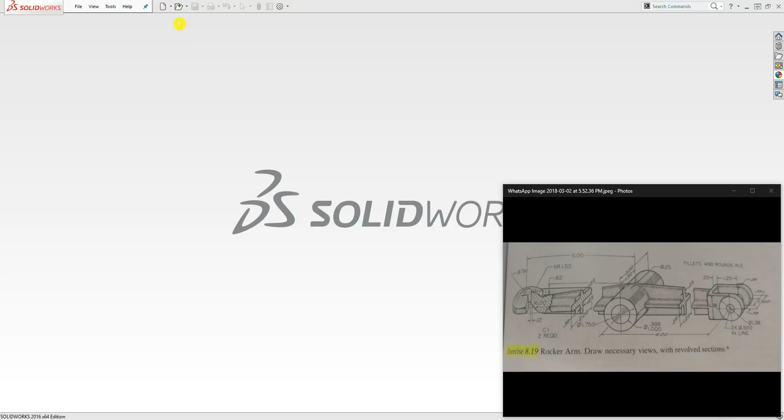So just start a new part file, and make sure you are in inch. Go to your options, document properties, unit, make sure you're in inch, and click OK.

The first thing we are going to do is start with this piece, and we're just going to model everything around this piece. The way I always find the plane to draw on is if I click sketch before I select the plane, all the planes come up, and looking at this view, I know I'm going to draw that on the front plane.

So I select the front plane, and you just want to draw your cylinder. Make sure it is on the origin point. I'm just going to move it here so you can see. We know the diameter of it is 1.75, so I'm going to set it to 1.75.

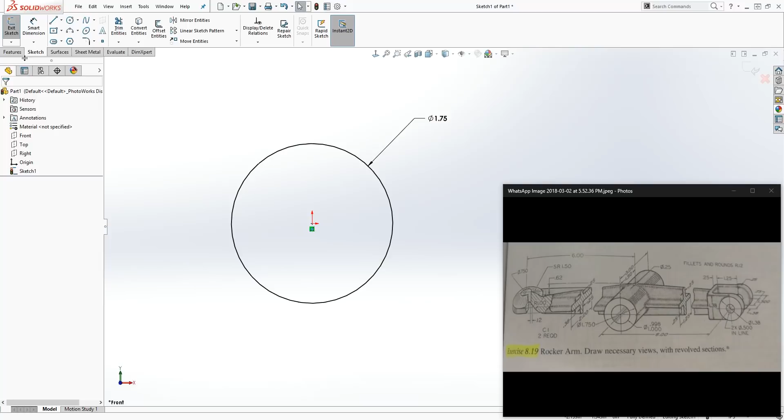Now you're going to go to feature, extrude. This is symmetrical because if you look, it is 3 and it's 1.5, so that means it's symmetric. I'm just going to extrude it by the mid plane, and the distance is 3. Once you have that, click OK.

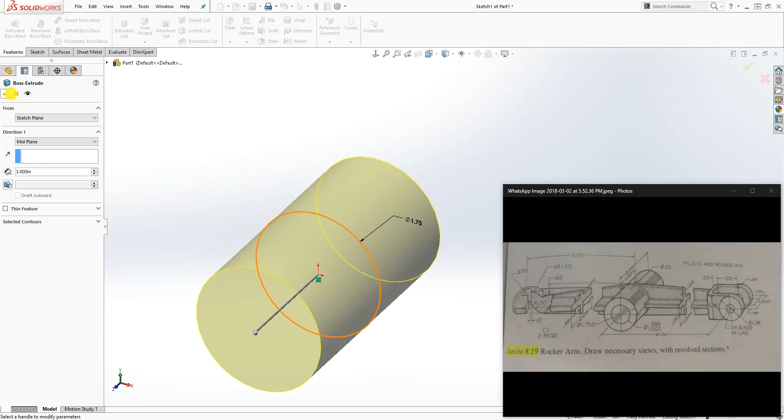Good, so now we have that. The next thing we're going to draw is this piece over here. So what you're going to do is, again, that's going to be on the front plane. Select the front plane, sketch, number 2.

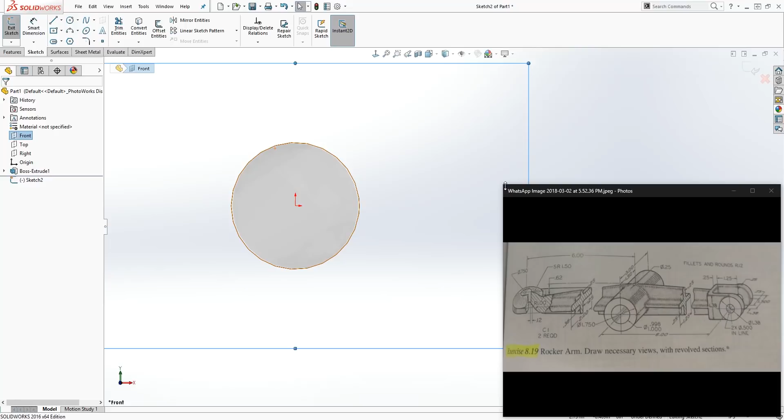I'm just going to zoom it over here because this is kind of in the way, maybe minimize this a little bit. Now draw a circle. Make sure the center point of this circle and the origin point is horizontal to each other. We know that the diameter for that circle is 1.38, so we can just add 1.38.

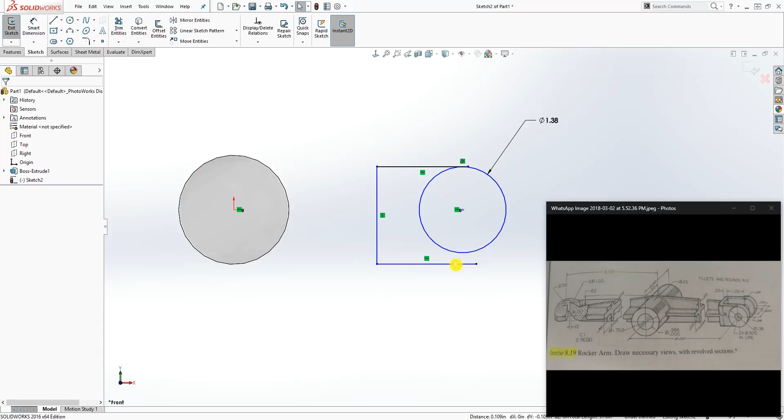Now we're just going to draw a line somewhere up here, a line down here, something like that. Make this line and this circle tangent, and the line and that circle tangent. Once you have all that, we're going to use the trim tool, and I'm just going to trim away all the excess line. Good.

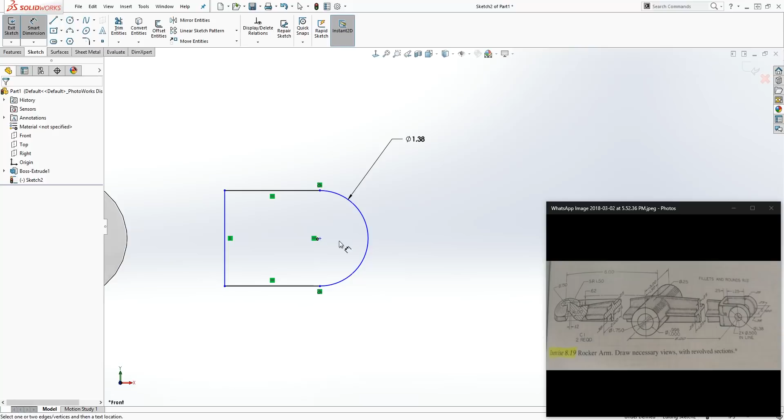So we have that. We know the distance from the center point to the back is 1.5 because it's 1.25 plus 0.25, so this distance is going to be 1.5. We also know that the distance from here to the center point is 6, so from this center point of this circle to this center point of that is 6. So that is fully defined.

Again, we're going to go feature, extrude, again by the mid plane, so you drop down mid plane. Right here, this is symmetry - see, the 0.75 is symmetrical, and the distance of this rib over here is also 0.25. So that is 0.75 plus 0.5, because it is 0.25, 0.25, and 0.75, so that's the distance we want. That would give us 1.25. Once you have that, that will be the distance, and click OK.

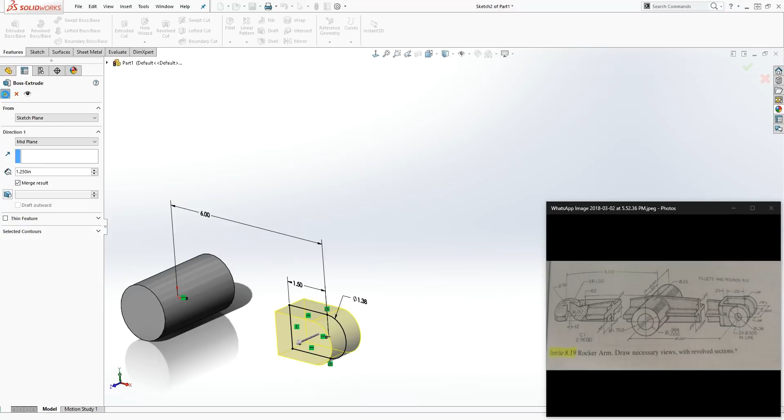Good, so now we have that. The next thing we want to draw is this little round piece. If you look, it tells you from here to that face is 0.38 because we are not doing that now - we only just need to add the extra piece on this side because this side is much thicker than the other side. We already have the 0.75 plus 0.5, which gives us the distance to about right here, so we just need that extra piece.

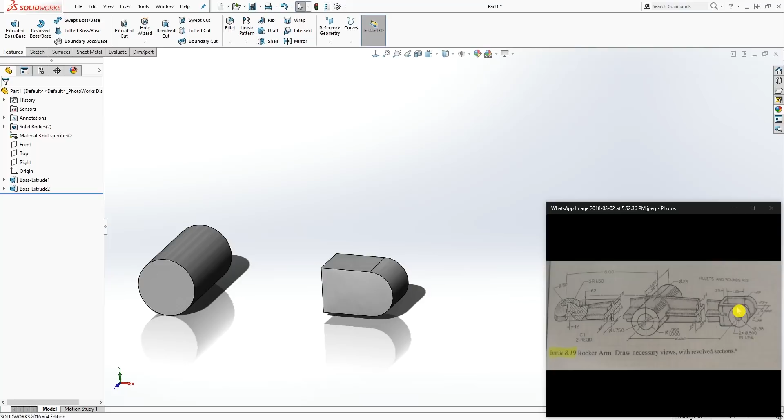So on this face, sketch, number 2, and you can draw a circle over here and make this circle and that edge co-radial. Once you have that, now you're just going to go feature, extrude. The only extra piece we need to add here is 0.13. I would measure everything once we're done so it makes sense. So it's going to be 0.13, and click OK.

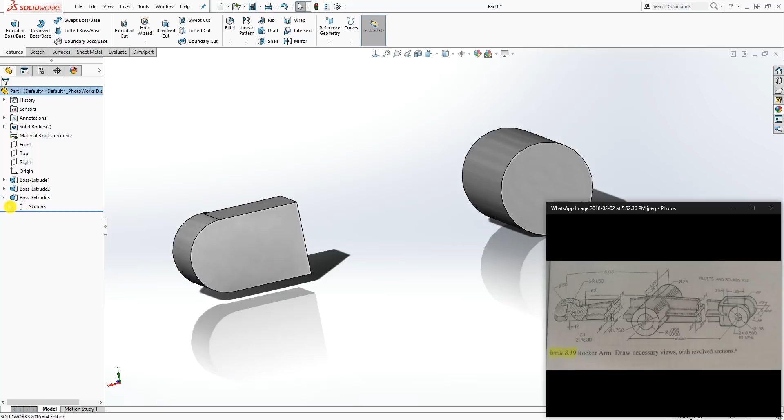And we're going to go on this side and do the same thing, but you can bring this down, show that sketch, and click this face and sketch.

And now select that sketch for this convert entity. So once you convert it to that side, then you can feature extrude, and this one is going to be 0.12,

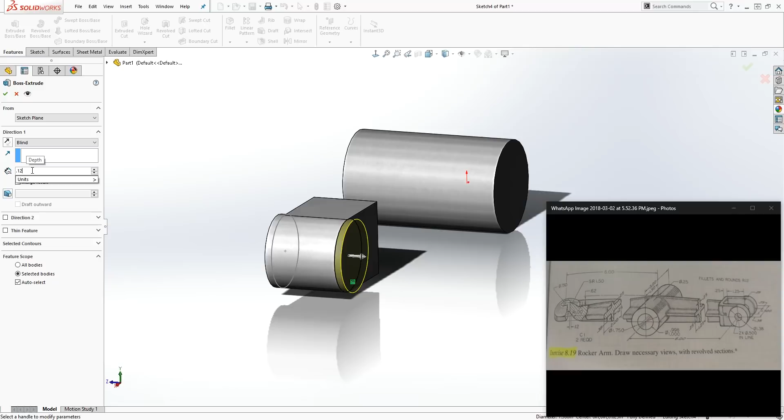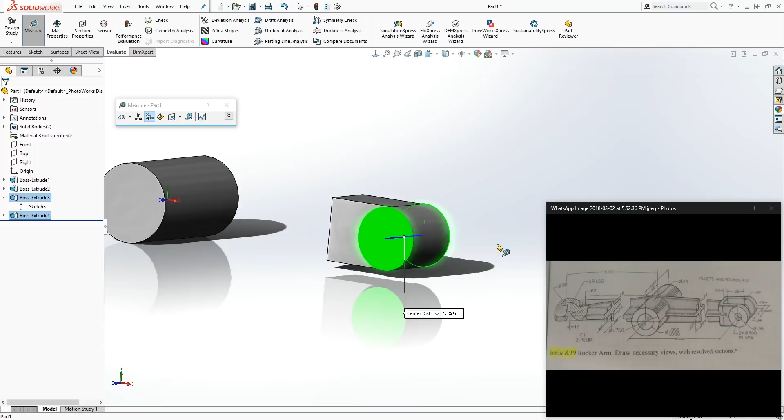and click OK. So now if I measure the distance from, and I can just hide this sketch because I don't need it. So if I go to evaluate, measure from this face to this face, it is 1.5, which is exactly what it should be. Good. So I'm just going to close that and moving on.

So now we are going to draw this rib over here. So what we're going to do is find that plane on the right plane, sketch, number 2. And I'm just going to draw a center rectangle or something like that. And the distance is going to be, say right here it is 0.5. So this dimension is 0.25.

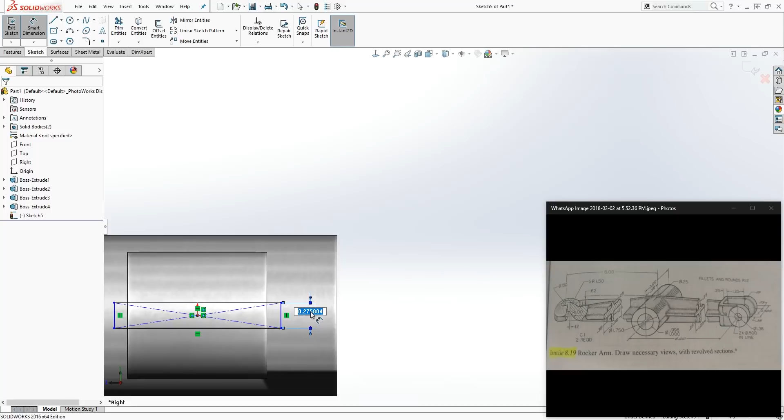0.25. So my keyboard is acting up a little bit. 0.25. And let me try that one more time. 0.25. Enter. Okay. And the distance is going to be 1.25. So right here, the length is going to be 1.25. And once you have that, so that looks something like that.

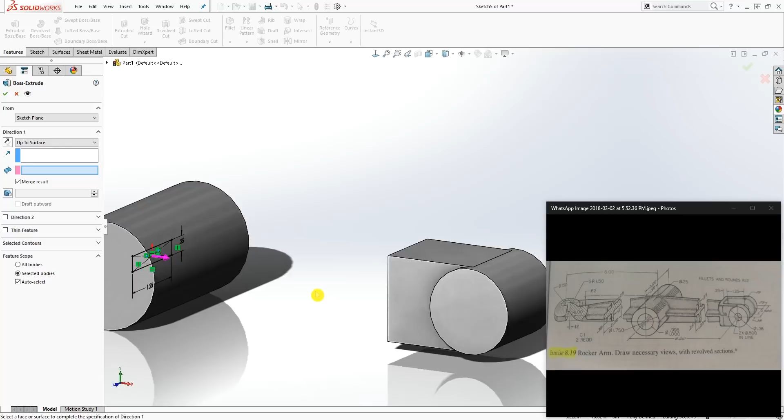So go to your feature, extrude. You want to select up to surface, and you want to select this face. So you want to extrude it something like that, and click OK.

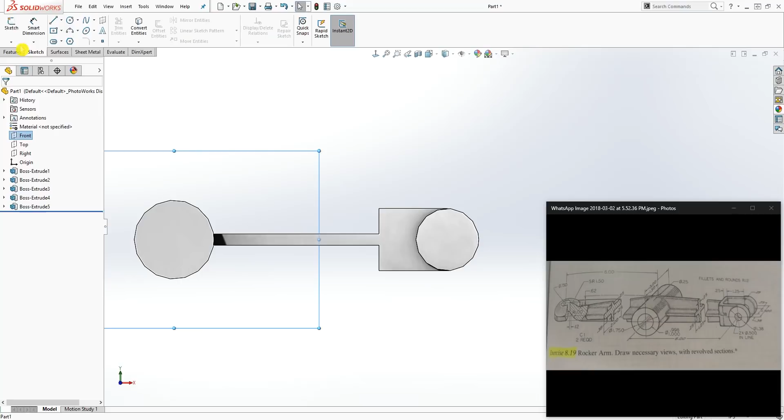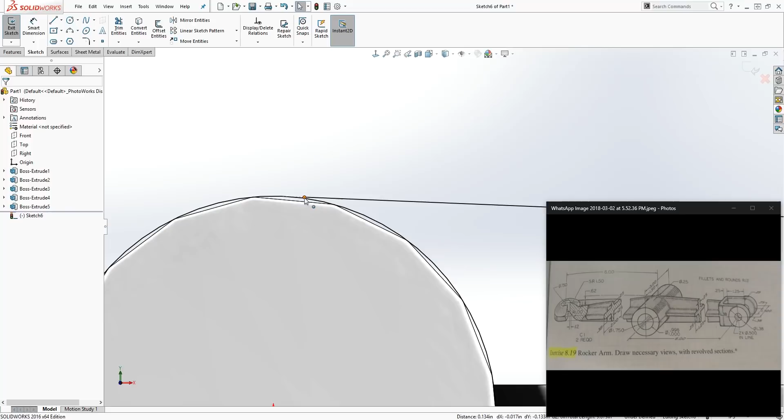Good. So the next piece we're going to draw is this top piece over here. So that one is going to be select on the front plane, sketch. So the first thing we're going to do is select this edge and convert entity, and now you just want to draw a line, something like that. Just draw a line that is coincident with that, and make that line and that convert sketch tangent to each other. And I'm just going to drag this out so make sure everything is touching.

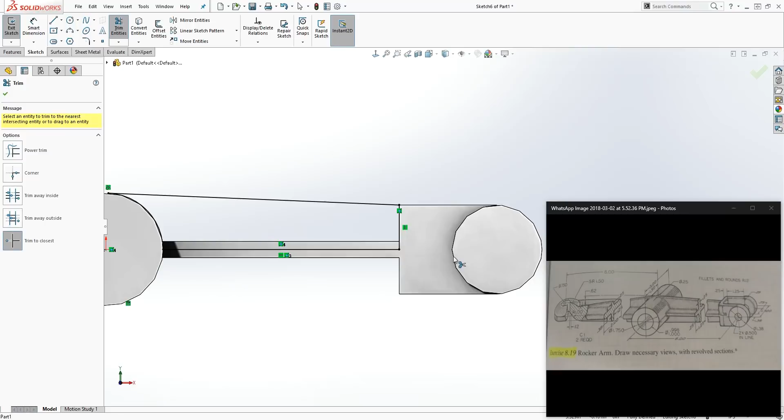Then I am going to draw another line over here down, and something coming this way. So you have this profile, so I'm just going to trim those excess lines off. So you should get a profile like this. So once you have your profile, what you want to do is feature extrude by the mid plane, and it is right here. That one is also 0.25, so you type in 0.25, and click OK.

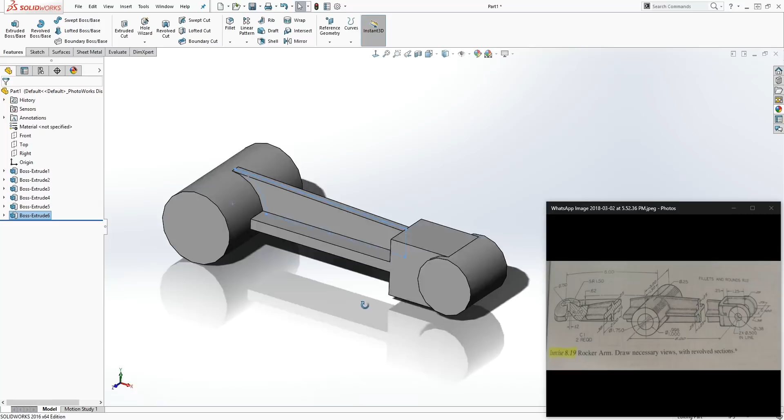Good. So once we have that, what we want to do now is just mirror it down. So we go to the mirror. We want to mirror it about the top plane, and the feature we are mirroring is this, and click OK. Good. So now we are done with this front part for now. So we want to make the same thing on this back end.

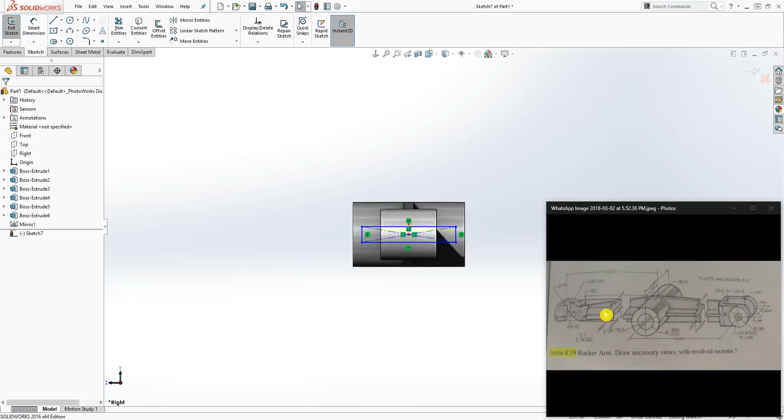So we are going to select the right plane again and sketch and number 2, and I'm just going to draw another center rectangle in there, something like that. And this one, the dimension is 0.38, so this is going to be 0.38, and the length is 2, right here, 2. So we're going to make that 2.

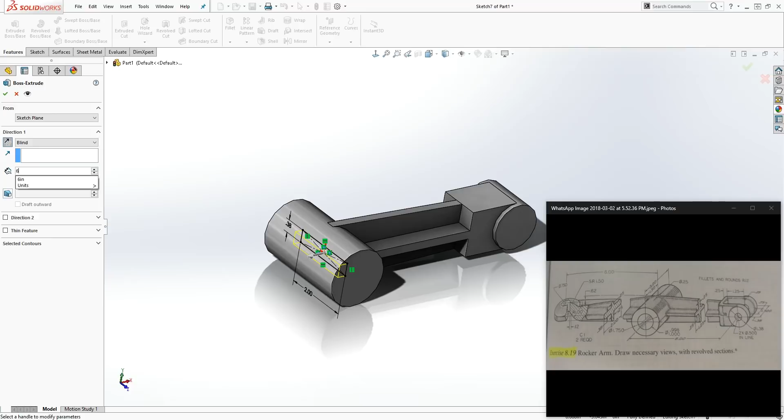And now we have that feature, and what we want to do is extrude in the opposite direction, and from that center point back to this center point is going to be 6. So that's what we are going to extrude it at, 6. So once we have that, click OK.

So once we have that, click on this top face and sketch, number 2, and what you want to draw. This part is not pretty clear, but what I think is going on is, if you look at this line, there's a line here, it's telling you that this rib is the same thing going around. So that's what we're going to do.

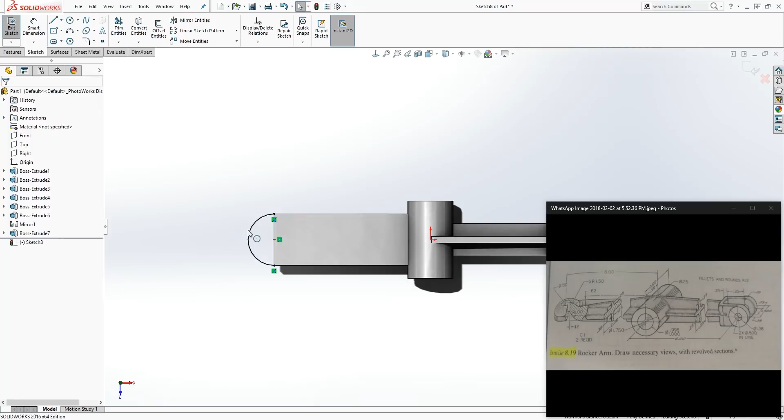We're just going to draw, use your arc. So I think I'm using the 3-point arc, and make sure the arc is coincident with these 2 edges and this center point and this edge, and you can either use the midpoint or coincident. It's still going to give you the same result. So once you have that, it should be fully defined,

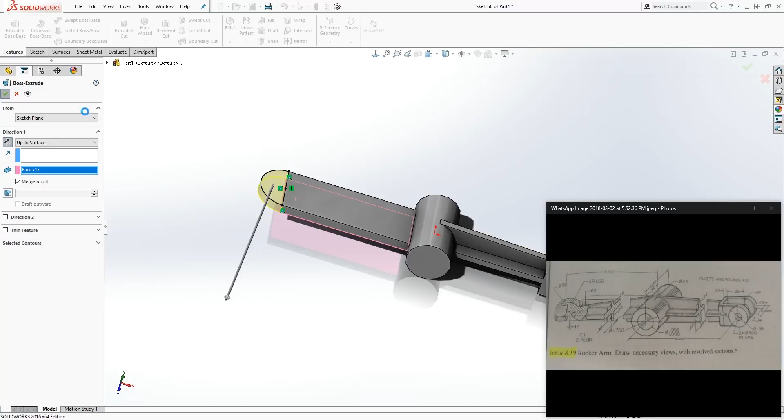and what you're going to do is feature, extrude. You want to extrude it in the opposite direction, you can do up to surface and select this surface. So you do something like that and click OK. Good. So we have that done. Moving on, now we are going to draw this little round. So the SR means spherical radius.

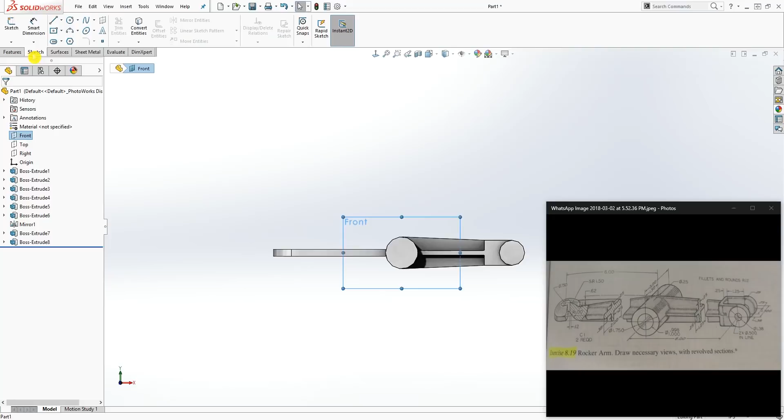So if you look at it, it's just like the same radius going around this edge. So what we're going to do is, on the front plane, sketch, and we are just going to draw, again using the arc, select that edge and just draw something like this for now. And another thing I will show is this sketch for this. I'll show that for now.

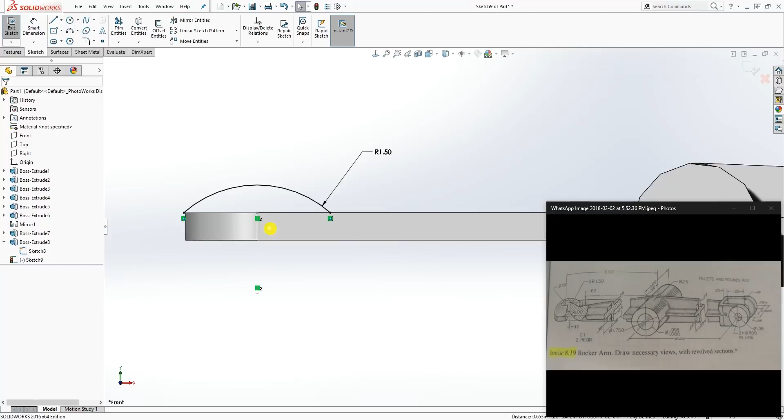So we want to make sure that, let me add my radius. So this is going to be 1.5. So again, we're going to make sure that this point and this point, the center point of that arc and the center point of that sketch, they are vertical to each other. So once you make it vertical, your sketch is fully defined, and that's what we want.

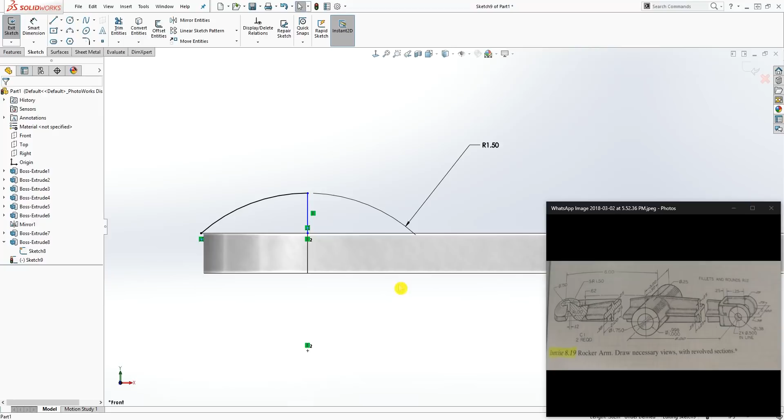And I'm just going to draw a line down here, and I'm going to trim this side off. Yes, we want to trim that side off, and make sure this is a vertical line, and also make sure that this point and this point are coincident. So good, everything is fully defined, and I'm just going to add another sketch here. So my sketch is fully covered, so now I'm just going to feature, revolve about this, and click OK.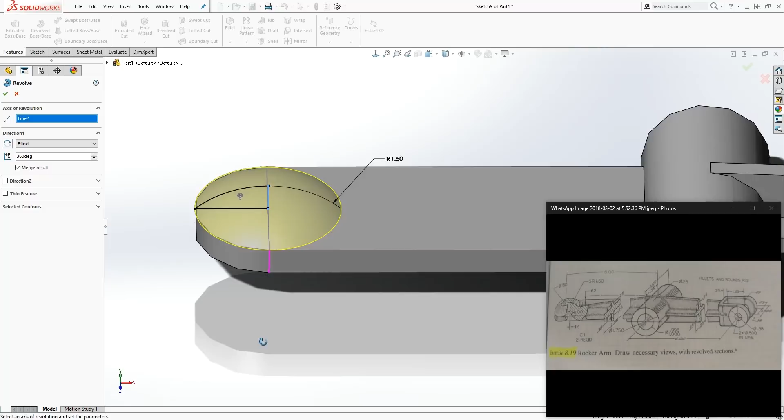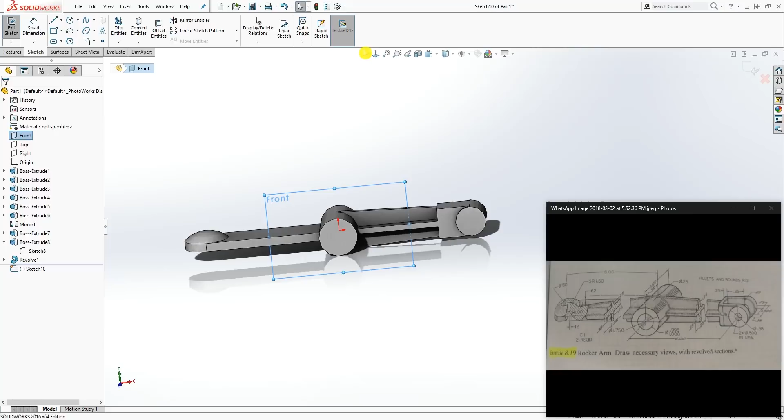Good. So now the next thing we're going to do is, I can hide this sketch, I really don't need it anymore. So the next thing I'm going to do is on the front plane, sketch, normal to, and I'm just going to draw the same thing. You can take this edge, convert entity, and you're just going to draw a line coming down.

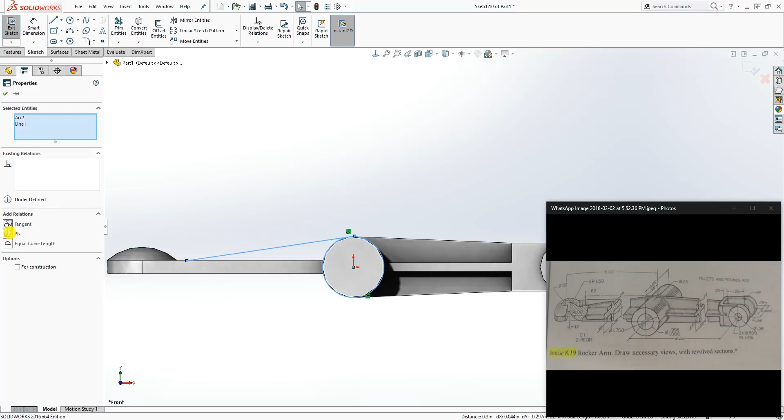And so once you have your line coming down, make sure this line and this edge are tangent to each other. And you know what, I believe if you look over here, this point on this line is coincident with this edge. So that's what we're going to do. So select this circular edge and this point, and you want to pierce it. Press the pierce. So that is fully defined, and I'm just going to go normal to.

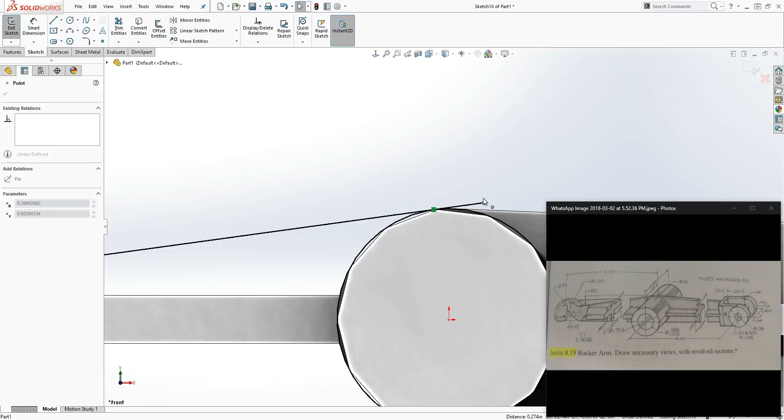So I'm going to drag this out, and we want to draw another line coming down, and just something like this. You can just draw it this way for now. And now all you need to do is just trim. We're going to trim the excess one off, and everything is fully defined. This line is also horizontal with this point, so when you move it down, make sure you make it horizontal. So you can click this point and that origin point and make sure it's horizontal. So everything should be fully defined, and you have something like this.

Then you go to feature, extrude by the mid plane, and the distance is going to be 0.25. So let's go 0.25, and click OK.

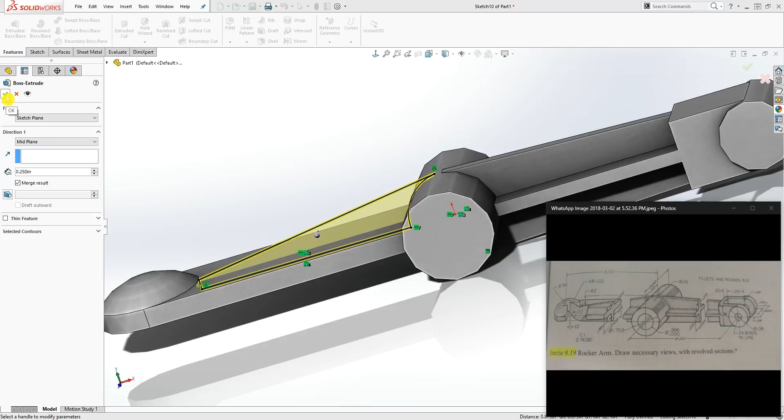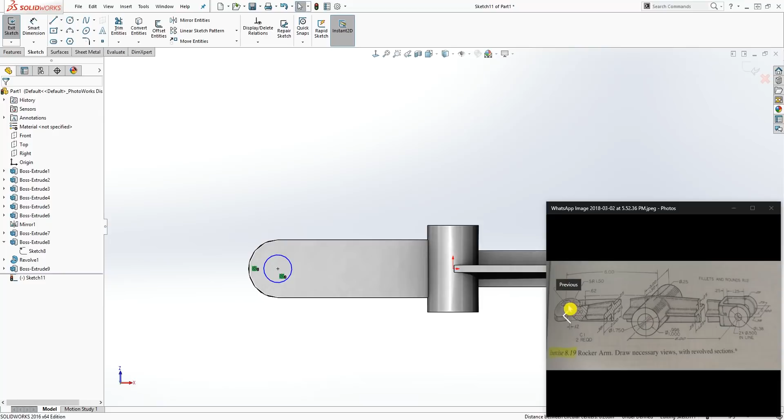Good. So the next thing we are going to do is draw this circle or cut this hole. So select this face, sketch, normal to. I'm going to draw a circle just somewhere over here, and select this circle and select this circular edge and make it concentric. So this is concentric with each other because you can see it from this line over here. So now the diameter for that circle is 0.75. And what you want to do now is feature, extrude cut, up to next. So once you have it up to next, good.

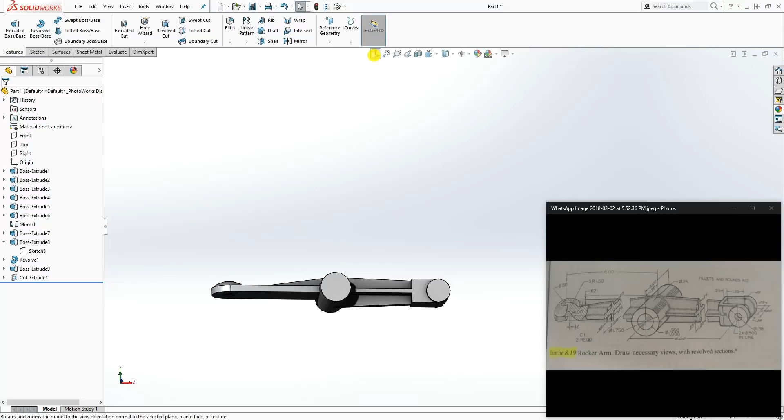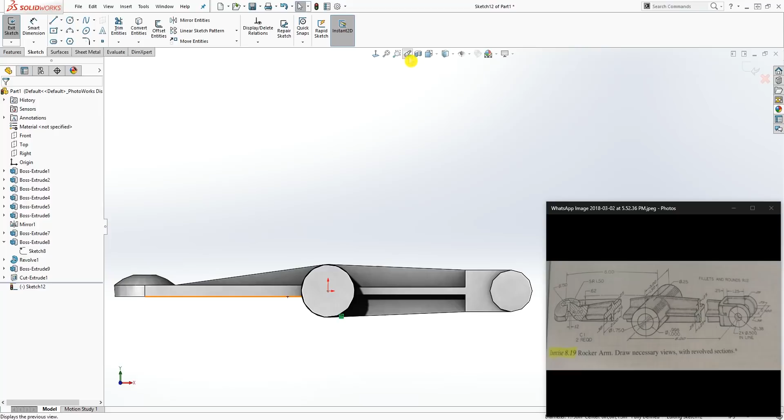So we have that, and the next thing we need to do, which is the last one to complete all this profile, is we are going to draw on the front plane, sketch, and again select this circular edge, convert entity, and I'm going to section this. So let me section it so you see what's going on. Over here there is a radius that comes down. I know this is not pretty clear, but this is how it goes.

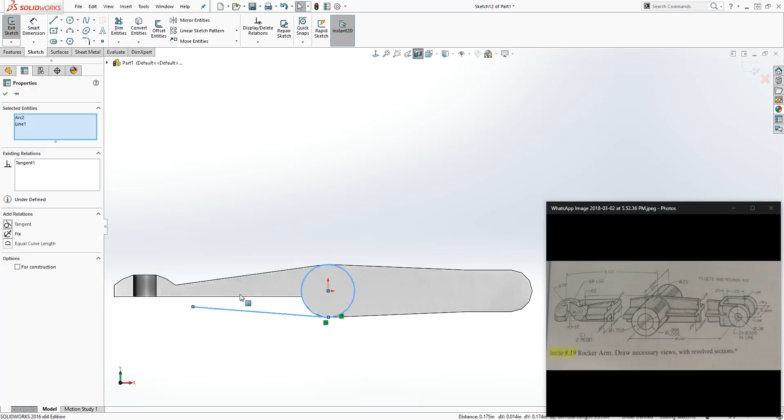So what you want to do is draw a line over here, something like that, and make sure that line and that circle are tangent to each other, and we'll just leave it like this for now. And you want to draw an arc. Just draw an arc, something like this. Click 2 points and leave it like that, and make sure this line and this arc are tangent to each other. So the arc that I'm using, if I click on this drop down, is the 3-point arc. So once you have that, again you can just drag this line down to make sure everything is touching.

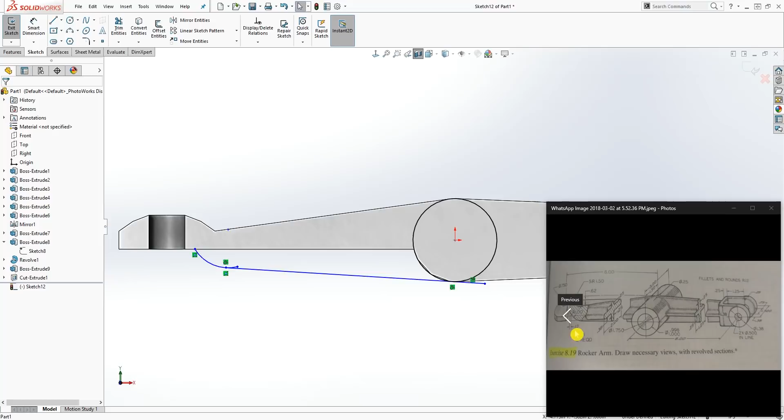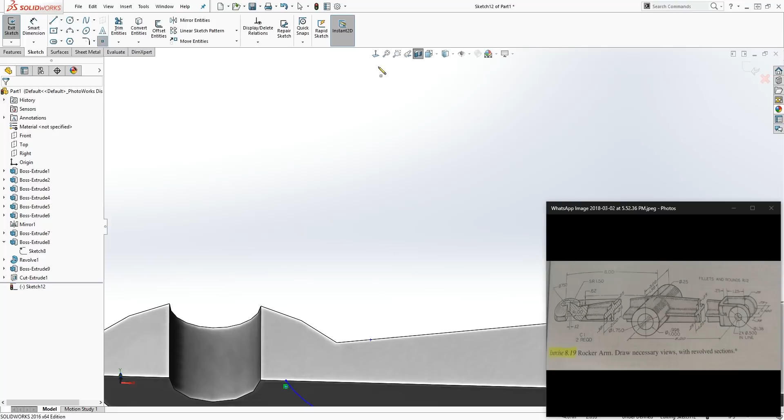And what you want to do now is, if you look over here, it says from the end of the arc to, maybe if I zoom this up, from the end of the arc to this circle there is a 0.12 gap. So that's what we're going to do. So what we're going to do is just put something over here. So I'm just going to click this point and I'm going to put a point right there. And it says from here to here is 0.12.

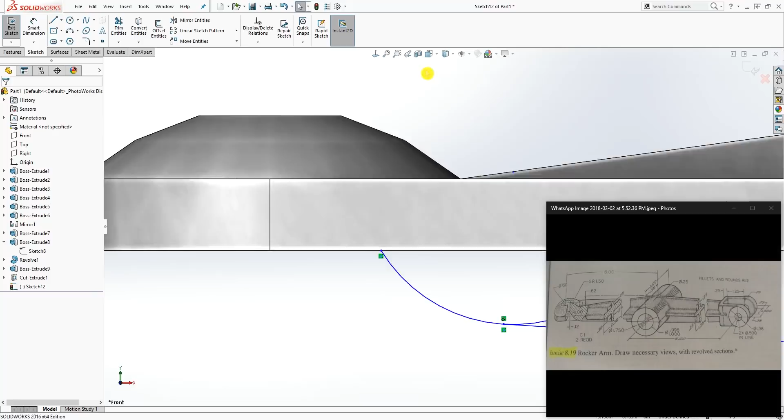So no, that's not what I'm going to do. So let me delete that. So I'm going to go like this. So select that point, and you want to put that point over there, but make sure that point and this circle, you want to pierce it. So that point should be on that circle. So that's what you want to do.

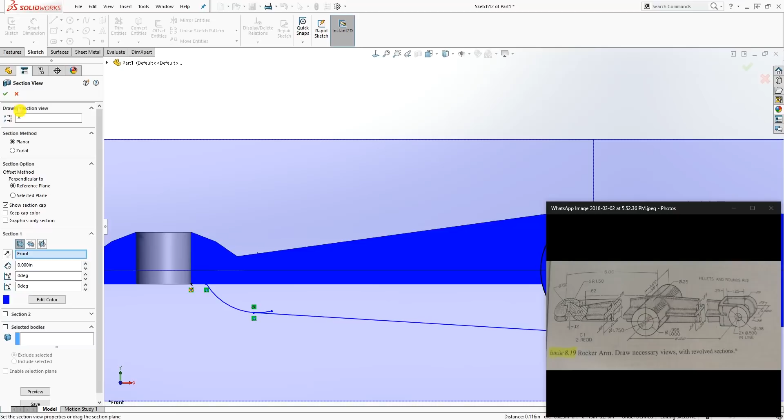So if I now go number 2, and if I section it, it should look like this. So that point is on that circle. So the distance from here to here is 0.12. So we have that down. I'm going to trim this off. If you look over here, it says the distance from the top part of it to the center point, so where the center point of this arc is, 0.62. So that's what we're going to do.

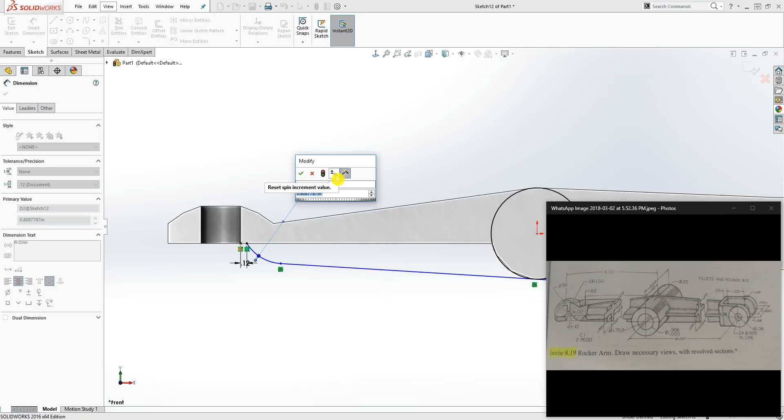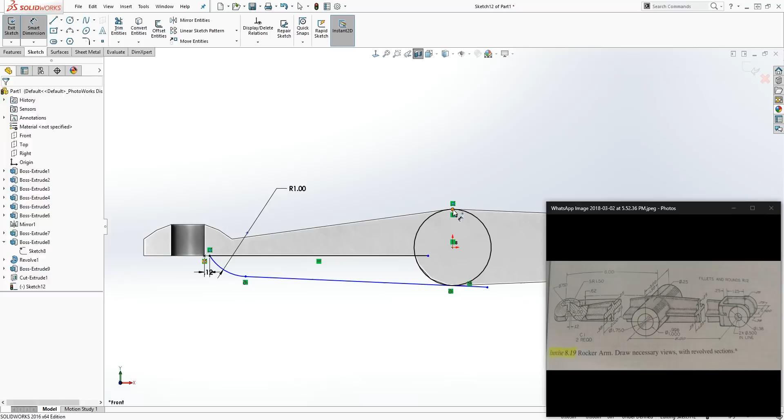But let's add the radius to our arc. The radius for this is 1. Yes, 1. And I'm going to also put another point up here. So let's draw this line first. So I'm going to draw a line coming down this way, and I'm going to put a point up here so I can dimension to it. So it says from this point to here is 0.62, which is right here, 0.62. So now everything is fully defined.

I'm just going to trim all this extra line off, and you should get a profile like this. And that is what this profile looks like. I'm sorry I'm taking longer to explain it. I just want to make sure I'm explaining it clear enough. So you should have a profile like this. Let me go number 2 so you see what's going on.

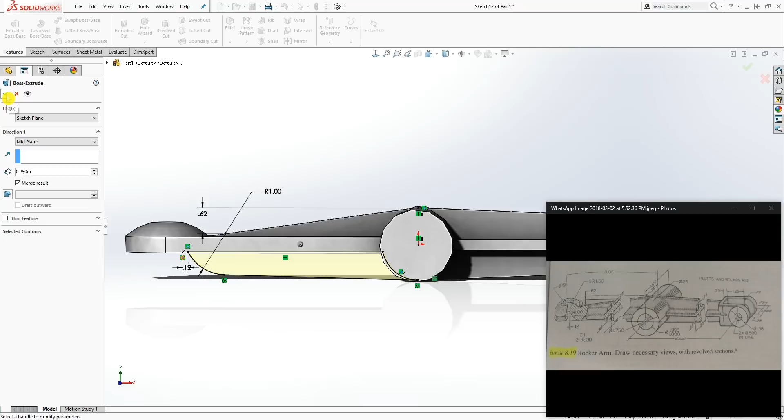So once you have that, I'm just going to feature. You want to extrude by the midplane, and that is also 0.25, and you're going to click OK. Good. And I'm going to improve my image quality because I don't like this being jagged. So just going to improve my image quality because I think it makes it slow. So good, we have the basic profile of this part down. The only thing we need to do now is just start cutting our holes.

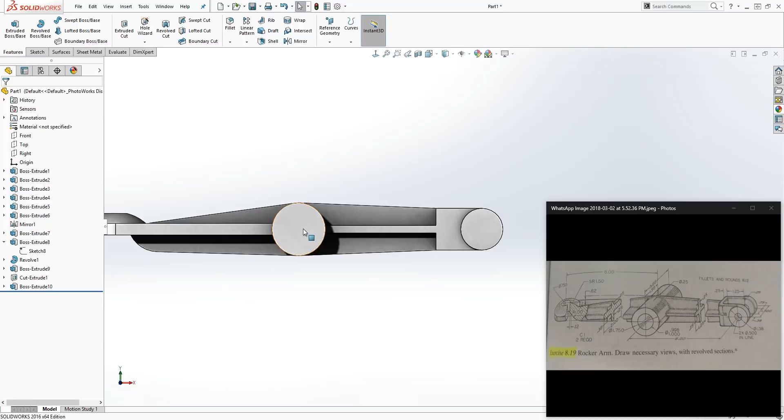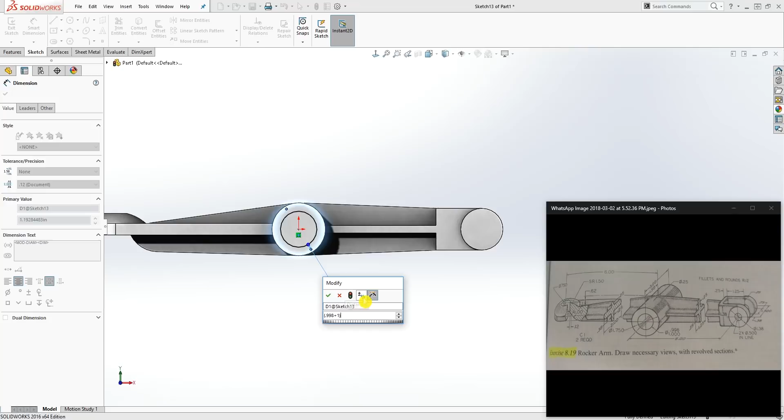So we start from here, click this face, sketch, we'll draw a circle over here, and you want to find the nominal dimension between these two. So how you do that is you add both numbers and divide it by 2. So I'm going to do (0.998 plus 1) divided by 2. So that gives me that dimension. So I'm just going to feature, extrude cut through all, and click OK. Good.

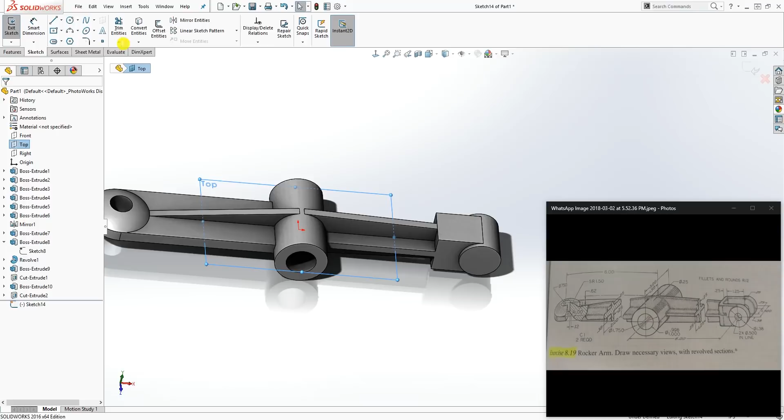So again, then we want to do the same thing on the top plane. We want to draw this circle. So I'm gonna do sketch, number 2, draw my circle over here, and the circle diameter is 0.25. So 0.25, and so you see what we have. And I'm just going to feature, extrude cut in the opposite direction and up to next. So click OK. Good.

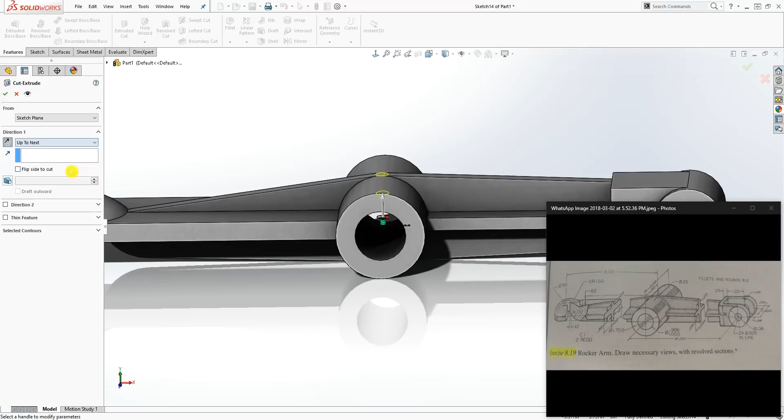And the next thing we want to do is draw over here. We want to cut this rib over here. So we'll click the top plane. On the top plane, sketch, number 2, and I'm just going to draw a center rectangle, something like this over here. Make sure it's not coincident or anything, just move it over there. You want to make sure the center point of this rectangle and the origin point are horizontal to each other, and we know the distance is 0.75, so we're going to make that

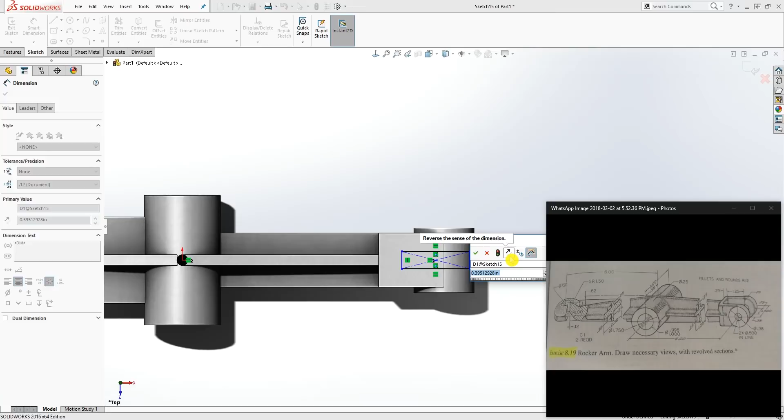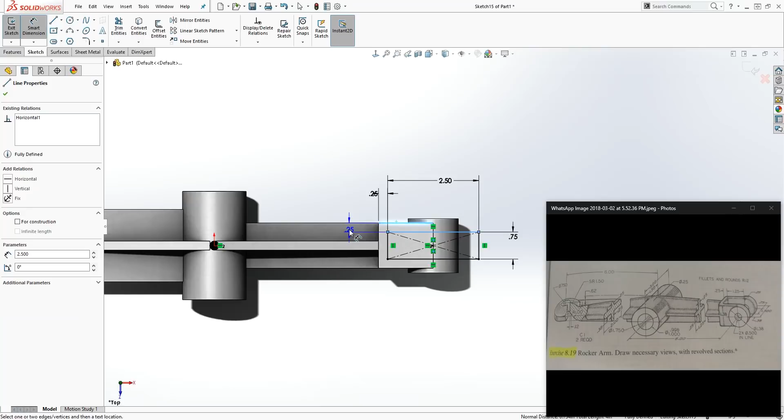0.75, and the distance from the back over here is 0.25. So from right here is 0.25, and all we need to do is just drag this out so that way it's cutting through our part. So you can just add a dimension to it, you can add anything. Let's make that 2.5. So my sketch is fully defined, and if I measure from here to here, you can see it's 0.25, which is that dimension. So once everything is good, feature, extrude cut, we want to extrude cut through all on both sides, and click OK.

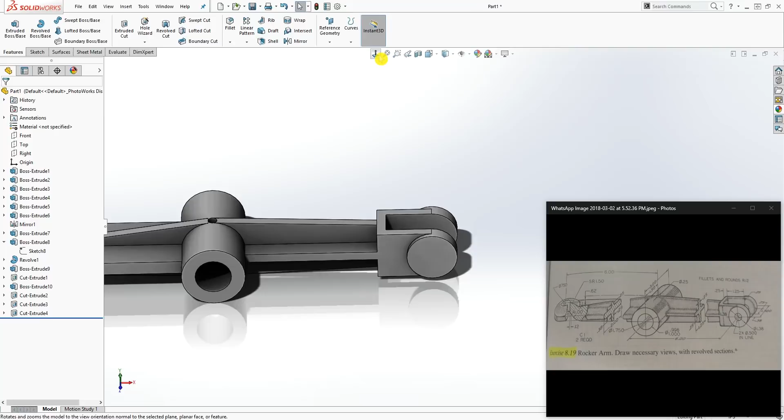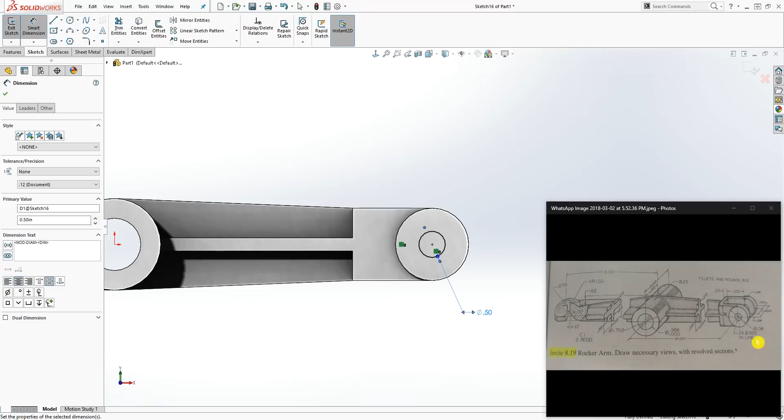Good. So we have that, and the last thing we need to do is cut this hole. So you can select this face, sketch, we'll draw a circle over here, select this circle and this edge and make them concentric, and the dimension for that circle is 0.5. It is right here, and I'm just going to do features, extruded cut, through all, and click OK.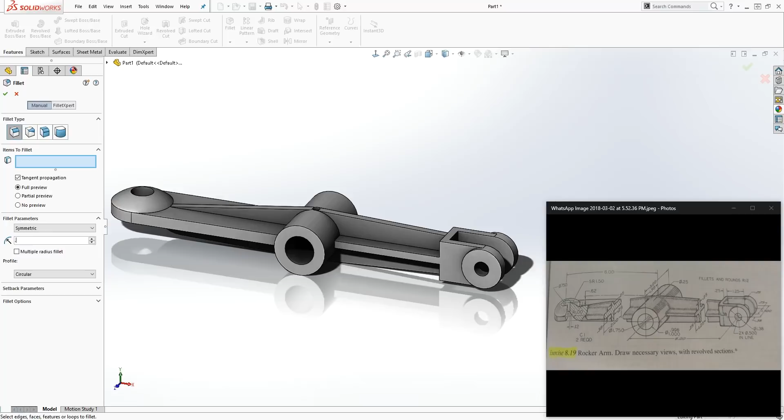Good. So our part is pretty much done. The only thing you need to do now is add the radius to this, and I'm gonna just show you real quick how to. So click on your radius, and the radius is 0.12. So we're going to type 0.12, and let's do the front first. All you need to do is just go around and select all the edges. You can select the face, it doesn't matter.

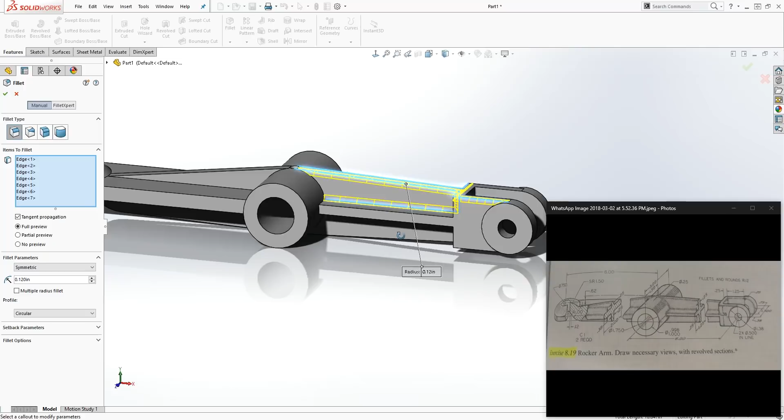Sometimes the radius is going to break because of how you add it. You see that one is breaking, so we might have to add all these ones first, then come back later on and add that one after. So I'm just going to select all this edge and the bottom over here, there. So over here, let me try this face, that won't work. So I'm going to select this edge, so that's breaking. Let me try this, that's also breaking.

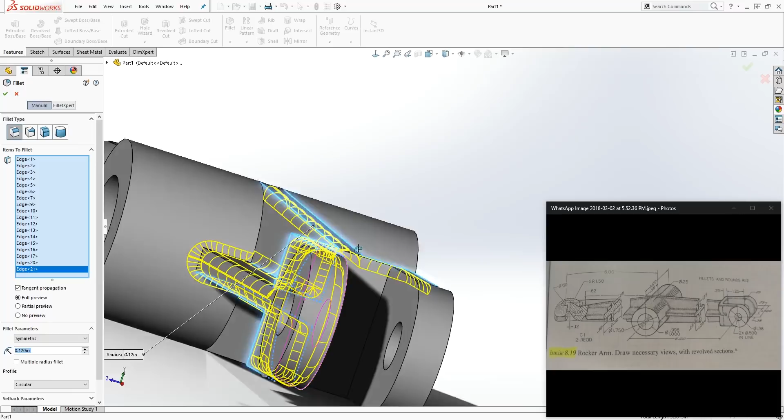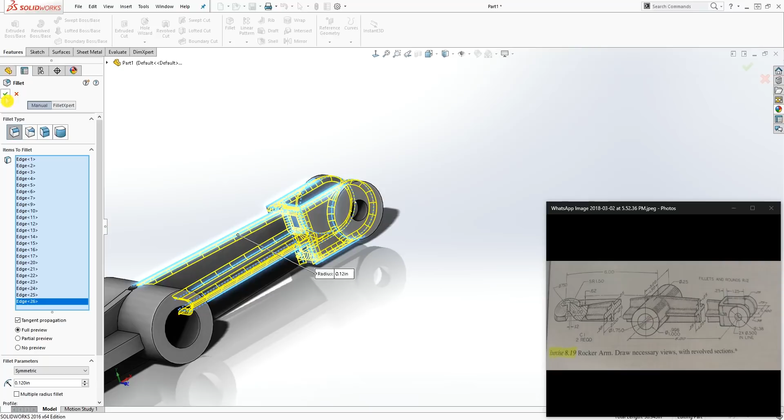So select this edge, and it's also on the inside. Select that inside edge right here, there, and there, and back here as well. If it gets overwhelming, you don't have to add all the radius at once. You can just accept that, and find where you need more radius.

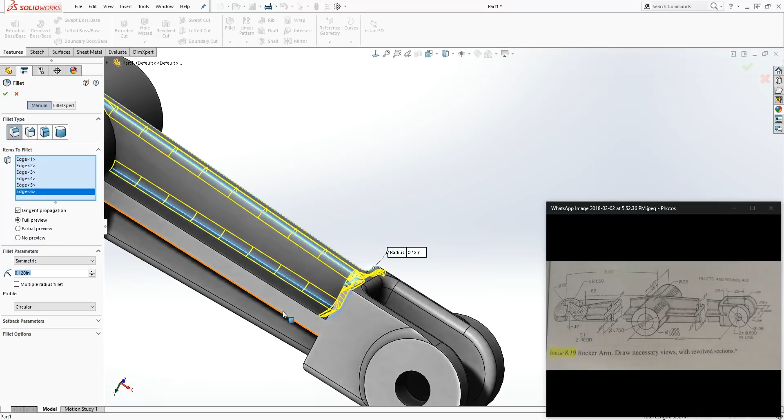So I still need radius over here, so I just select radius again. Now add it over there, over here, there, here. So you get the gist. You just gotta keep going around and adding all the radius. If you ever come across a part where the radius isn't working, you probably have to add it in two instances, or you need to change the order of the radius. But you should be able to get all the 0.12 radius on this part.

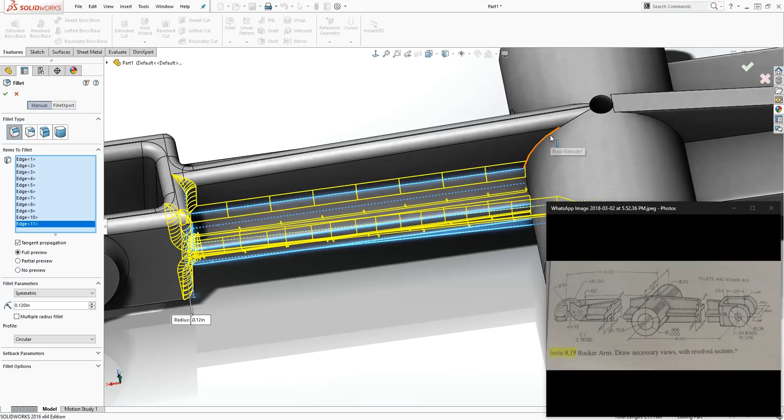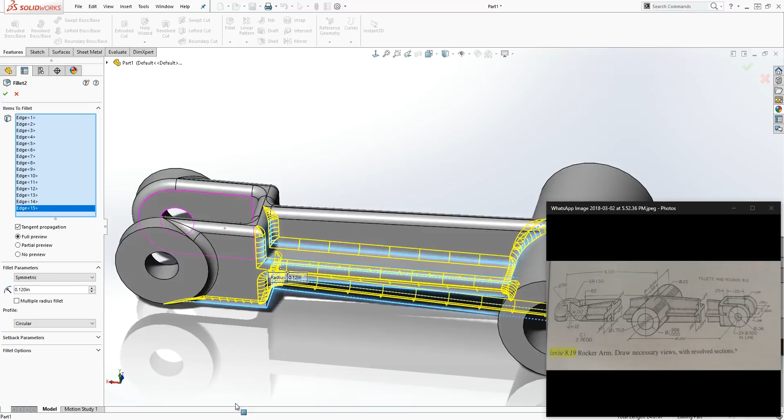So I need one over here, another one over there, and another one over here. So I'm gonna click OK. See, I'm missing a radius over here, so I can edit this radius and add one over there. I click OK. So that is the radius for this part. What you should do now is come to this part and add the same radius over here. So I'm just gonna come back here.

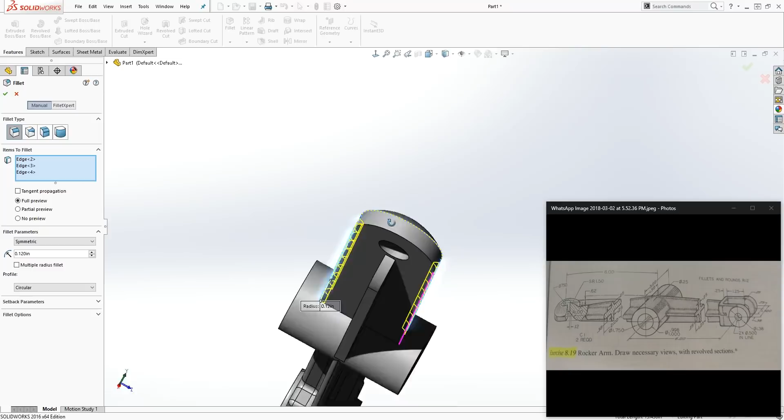Let me try to add one real quick. I wouldn't start with this edge first, so I will try to add these ones. This radius doesn't go over here, so for that one, uncheck the tangent so it doesn't go around. And it does go around on the bottom, so you add it to that one. It's breaking, so I'm just going to add another radius over here. There you go. And right here, that's breaking. So you pretty much add your radius wherever you can fit it for now. Some of it is going to break, but you can just go back and add it twice.

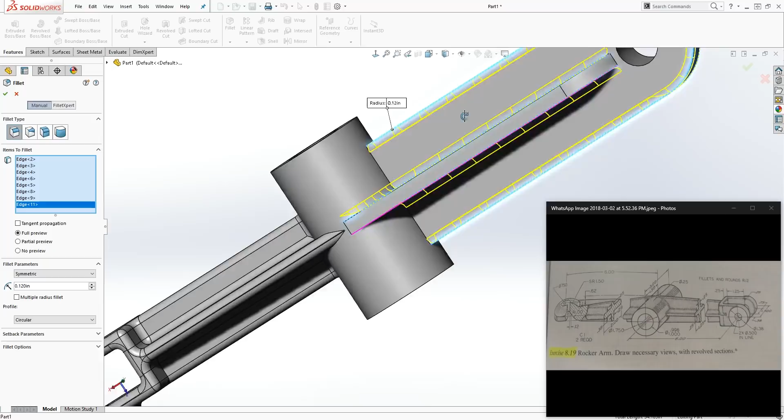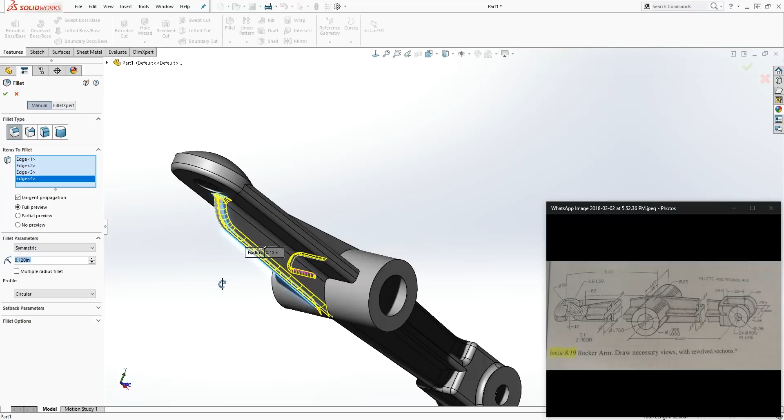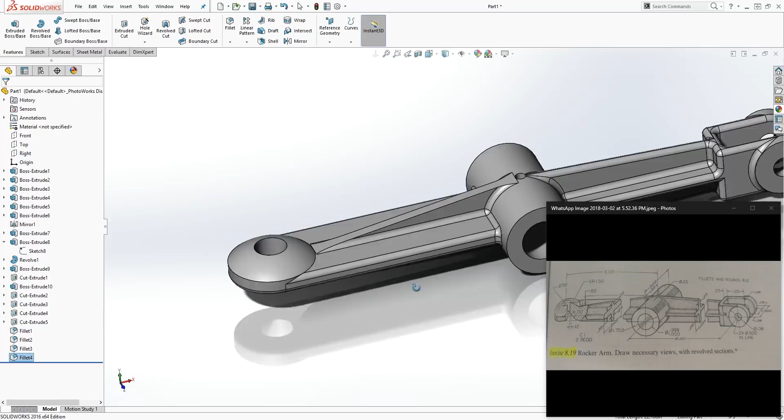Let me accept that for now. Then I'm going to add my radius over here. Here and there. There you go. And here, and here, and here, here, this corner, that corner, and the only part that's left is this top part. So let me see if I can get that in. It's breaking, so I'm just going to accept it, and for the last one I'm going to come back, radius again, and add it to this top part.

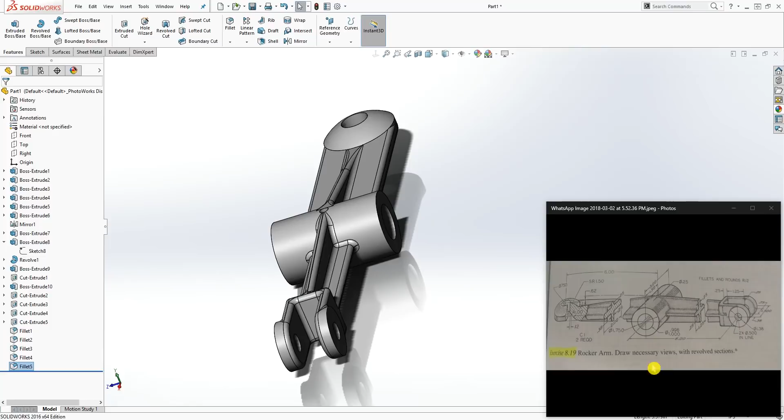And there you go, that is this part, and we are done. So you should be able to get all your radius in. I know this kind of took longer, but I like this part. It's a little bit complicated, but we got it through. I'm still missing a radius there, but anyway, just go around and add the radius wherever you need it.